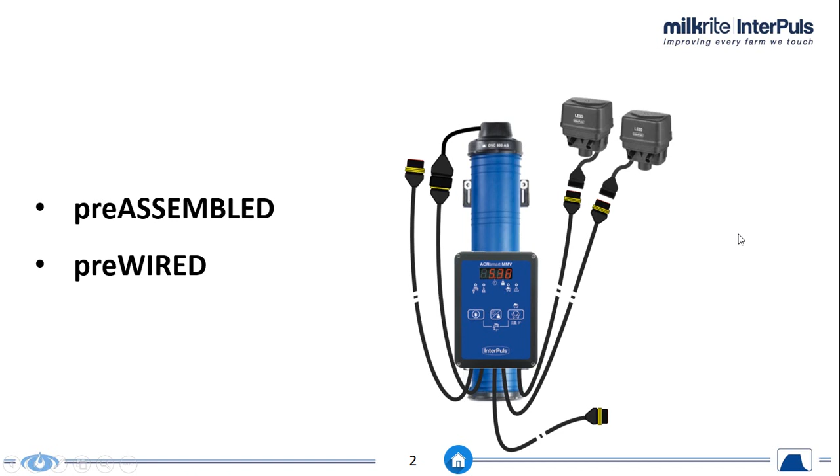In each box we have a unit that comes completely pre-assembled, pre-wired and pre-programmed. All we have to do is connect the unit to power and connect the sensor, and then the milking system is ready to go.

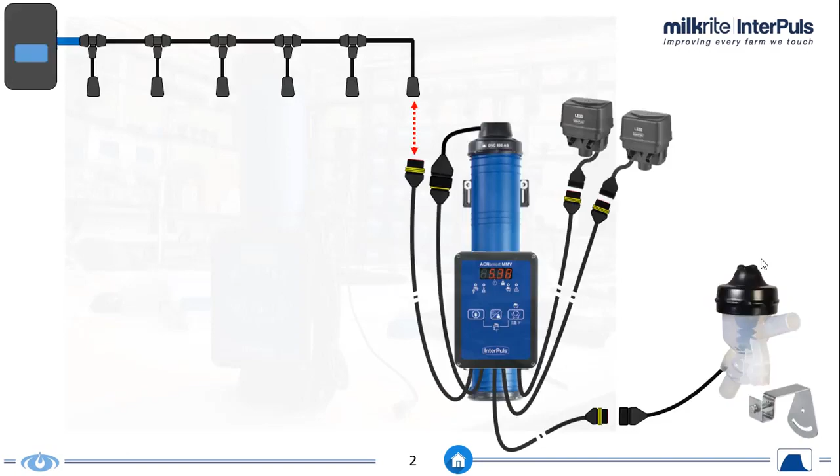This is the unit just out of the box, and here we are, for instance, in a milking parlor that never stops milking. This is one of those heavy-duty systems where the system is stopped just for 5 minutes between one shift and the other.

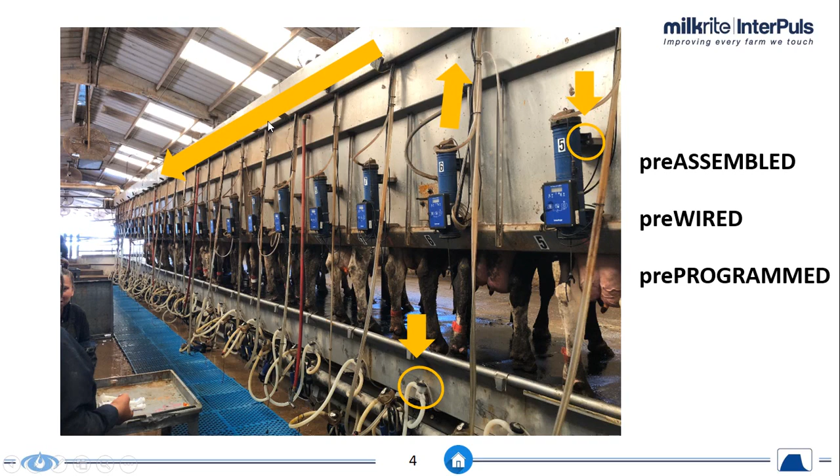In a similar situation, the dealer just has to install the cylinder on the metal frame. He has to put the sensor in a proper position, and then he has to bring all the cables to a safe place where he can run his plug and play easy wiring without compromising too much milking operation. The installation is very fast.

This is really cutting a lot the cost of installation, is minimizing the disturbance in the milking parlor, and also this permits to instruct a local technician at the farm to easily replace a cylinder, a panel, a control valve, a pulsator, a sensor in case of a problem without stopping milking.

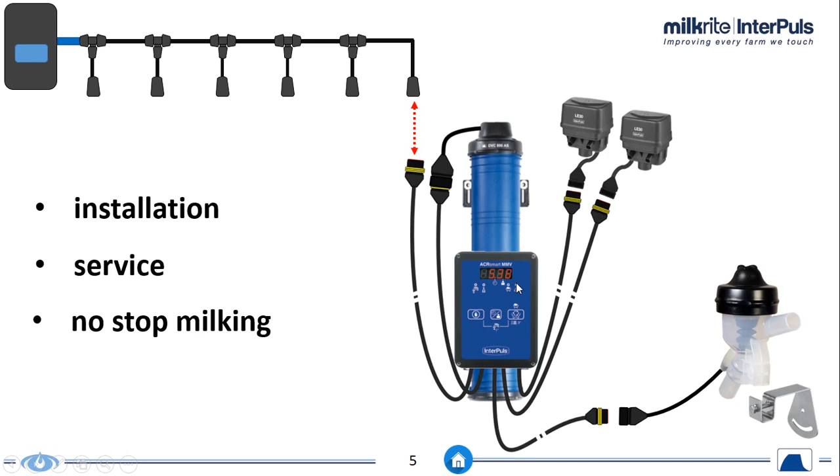This is extremely important. The service can be done overnight by a technician at the farm. This doesn't require any particular technical skills.

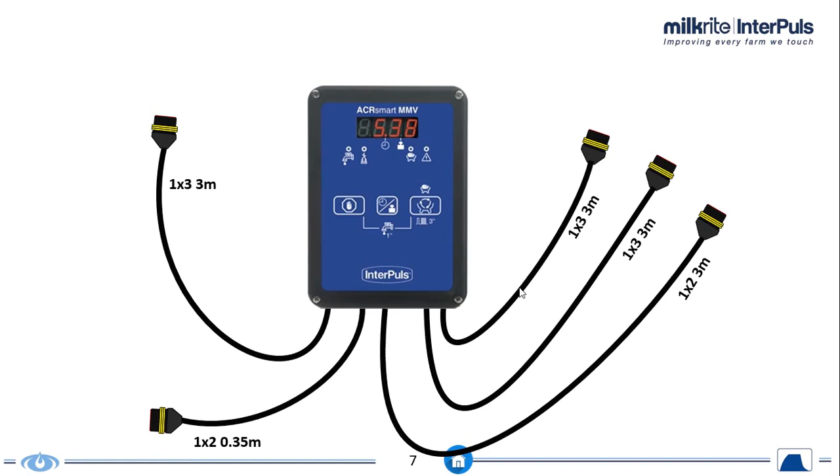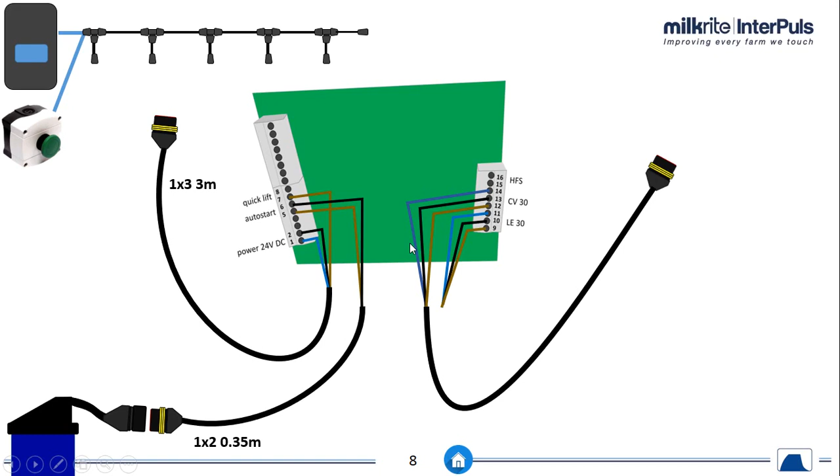What do we mean when we say that the system comes pre-wired? There are 5 cables. The first one is connected to power and quick lift - we will see later what quick lift is. A second one is connected to the auto start on the cylinder. Then we have 2 cables connected for control valve and pulsator, and the final cable is connected to the HFS. All this wiring job is done in our factory.

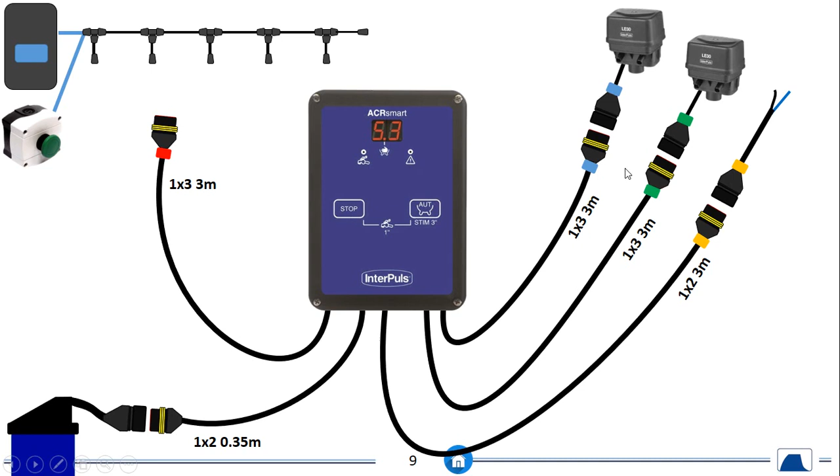So the dealer receives this unit with some colored rings to prevent error while installing it. We really try to make the operation as easy as possible and as problem-free as possible.

The panels are pre-programmed. What does it mean? We have a lot of parameters because some of these panels are ready to work both as detacher and as milk meter. Of course, they will be all pre-programmed in order to work as detacher, and they will be tuned for heavy-duty farms.

What we recommend is to install a couple of panels, let them work for 2 days, for 1 week, whatever. And when the farmer is convinced, you fine-tune all the parameters in order to obtain the best possible detacher level, etc. There will probably be 2-3 parameters that will need to be fine-tuned in that farm.

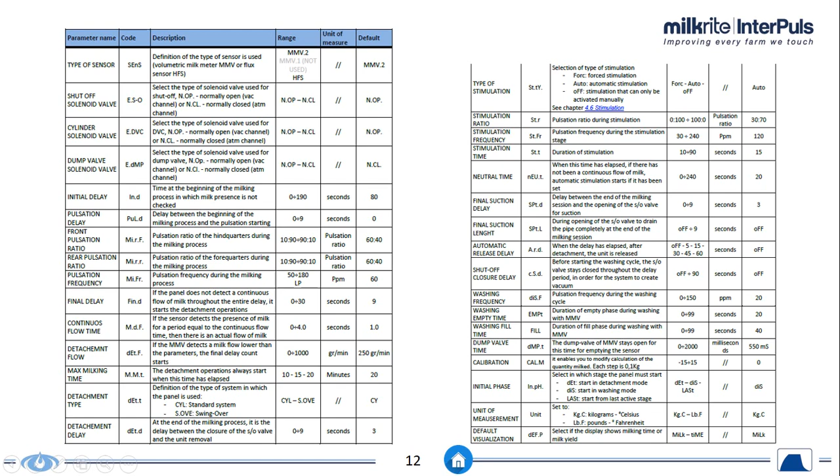Then you can make the same modification on the remaining 44 or 46 panels in the office. You bring them to the milking parlor, and then you can install them very, very quickly.

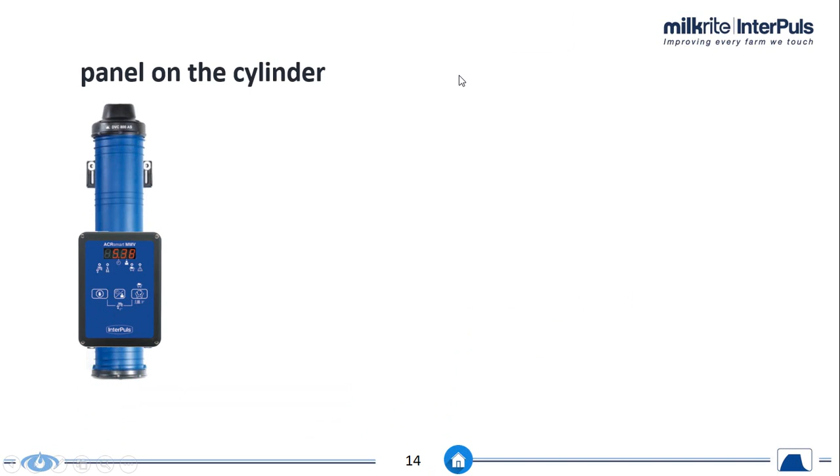The idea is to have 4 models at the moment. Maybe we will add more. One model will be with the panel mounted on the cylinder. Another model will be with the panel separate, and in this case we will have a longer cable - 3 meters for the auto start.

We are thinking if there is also the need, but we wait to collect some more data, for a similar situation where the dealer didn't want to use the plastic vacuum cylinder, but wanted to continue using the existing air pressure cylinder with the chain, etc. In this case, it was not possible to use the plug and play. We are considering if there is the need to create a 3rd plug and play for this situation.

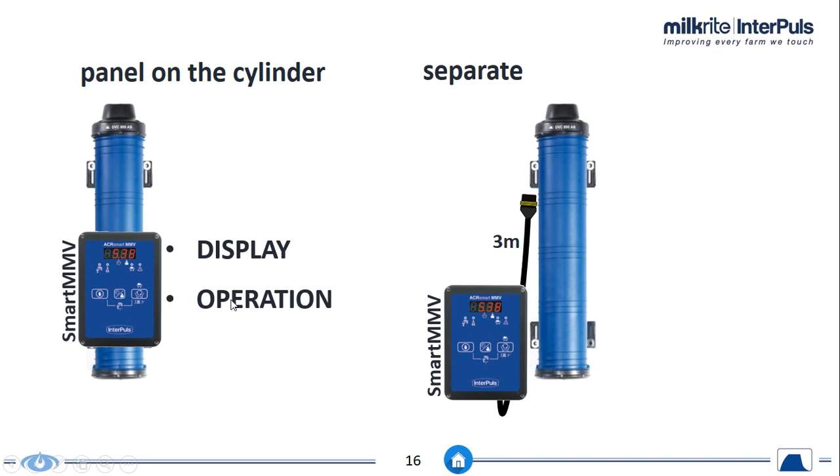At the moment, we will start with 2 models, MMV. What do we mean with MMV? On this panel we have a large display that permits checking milking operation and helps during programming. We have 3 buttons that help milking operation and programming, and we have the possibility to upgrade this panel in the future with a milk meter, in order to transform this system from a simple detacher to a real milk meter system, ICAR approved.

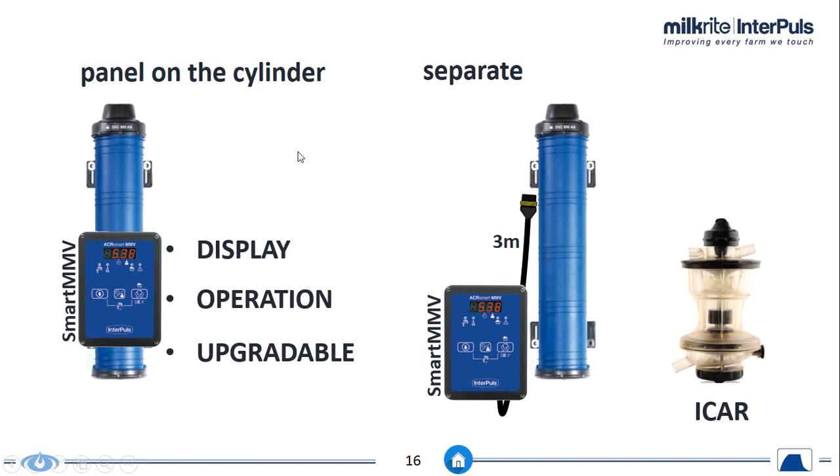But we want to introduce also 2 more models, not with the MMV panel, but with the smart panel. This has a smaller display, only 2 buttons, and cannot be upgraded to a milk meter, but of course it will come at a lower price. So if the price is the driver, this is a good solution in any case.

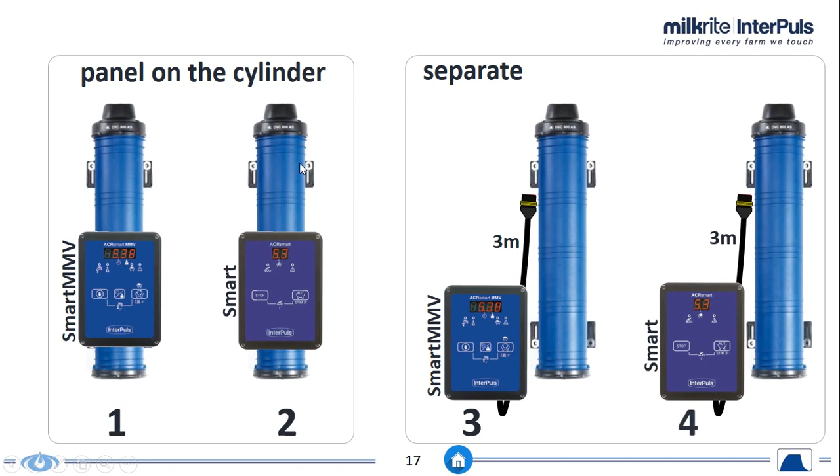As I mentioned before, now we have the idea to launch 4 models, and we will investigate if it is the case to put 2 more models for this particular situation.

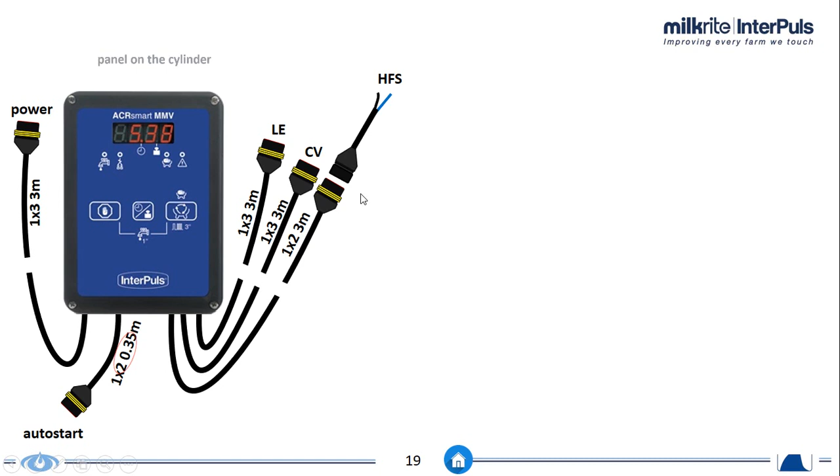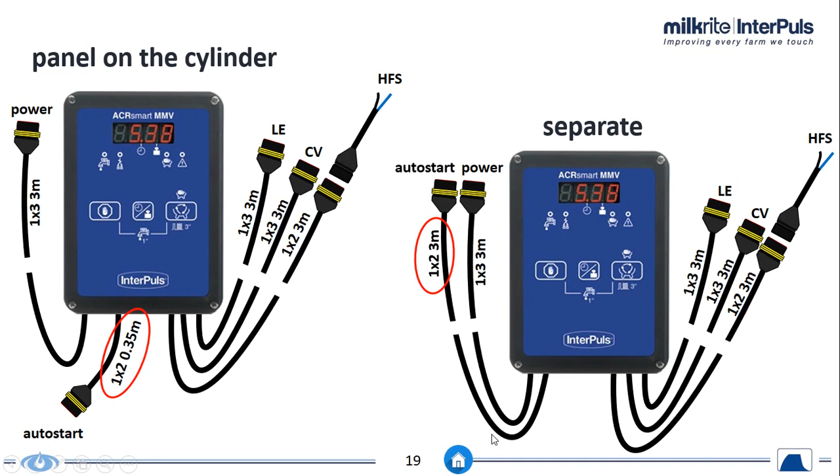The main difference between the model on the cylinder and the model separate is, first of all, the cable - which is only 0.35 meter in the model that goes on the cylinder, the autostart cable I mean, and in the other case is 3 meters long. But also in the separate model, the bracket for the panel will be optional, because we have few dealers who manufacture their own pre-shaped support for the panel, so they probably don't want to buy the one that we provide.

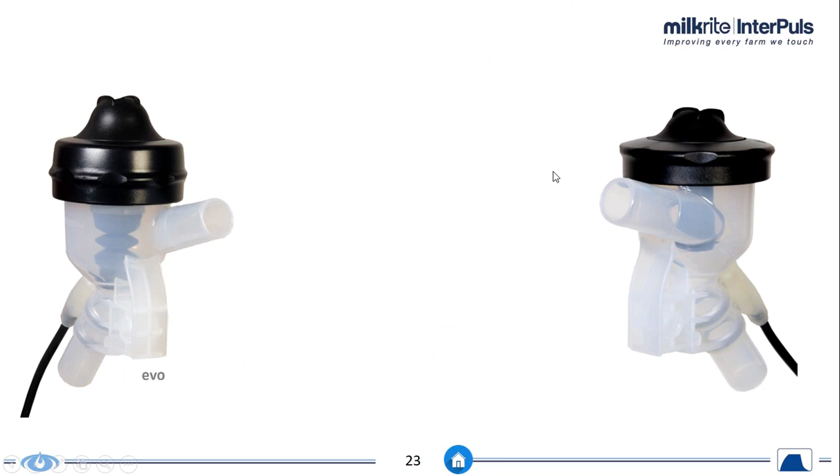So it will be optional, you can buy it or not. Also, the HFS sensor will not be included in the box, because we want to give dealers the possibility to select the Evo or the standard model. And the bracket for the sensor will not be included either, because some dealers are manufacturing their own bracket.

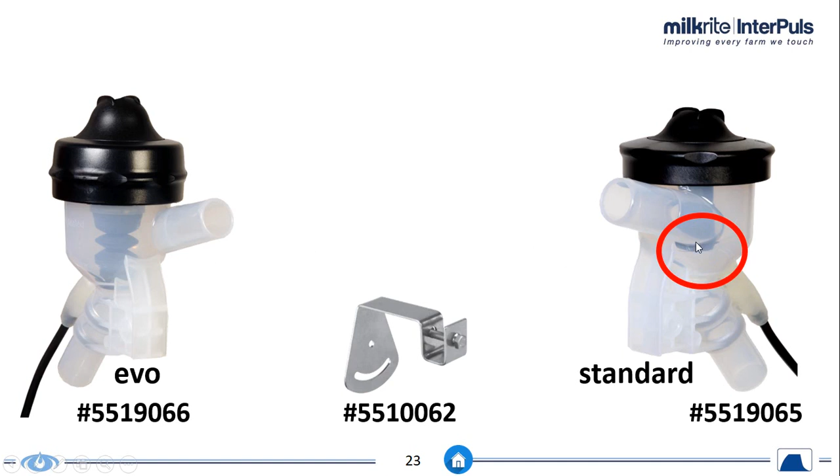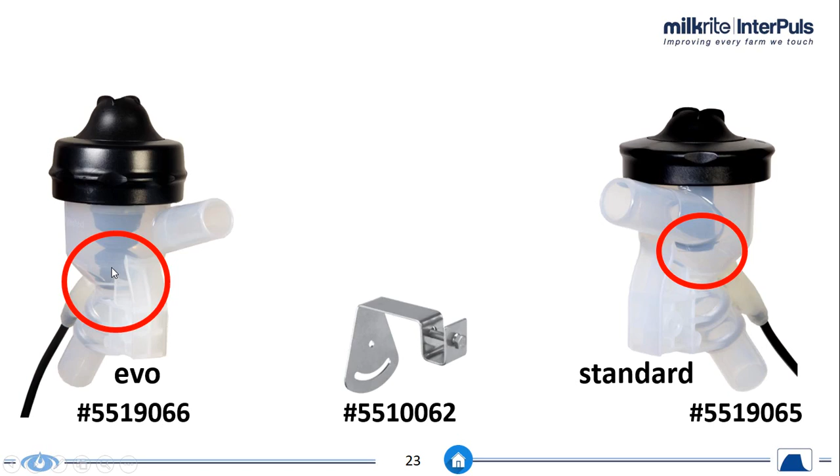The difference between the standard and the Evo is simple. When the vacuum pump is switched off, the standard starts open while the Evo starts completely closed. This is a big advantage to help vacuum build up when we switch on the pump. But on the other side, the Evo has more parts, it's a little bit more tricky to service, and it's more expensive. So what's important is to have the two options.

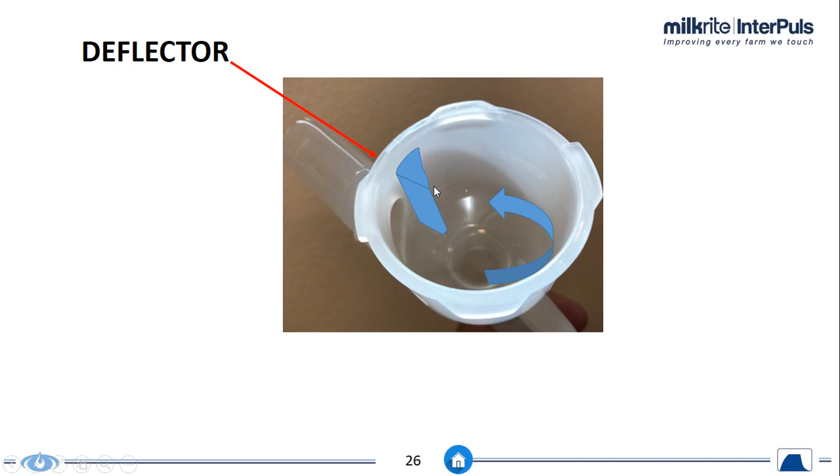Both options will have the deflector. What is the deflector? It's an element we introduced recently. You see it's co-molded here in the body of the sensor. The deflector stops the fast spinning air, especially in heavy duty conditions when 4 liners are open together. This creates noise, and also when we have high genetic cows, the deflector helps reduce the vacuum drop. So these are the two big advantages.

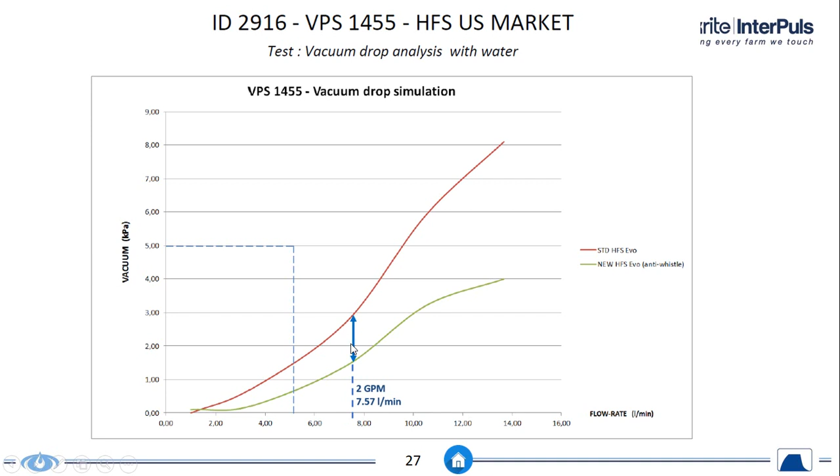It can reduce the vacuum drop in most cases by half. So, big advantage, the deflector.

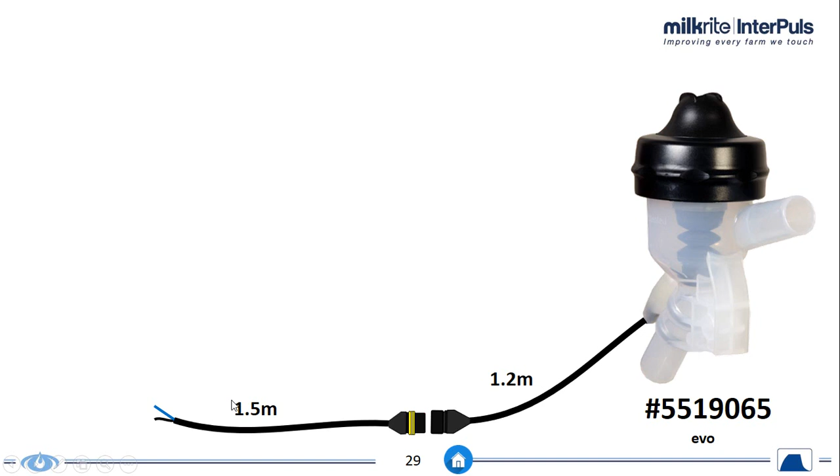Both models, the standard and the Evo, will have a pre-connected cable. This is co-molded, 1.2 meters, with a plug-and-play connector at the end. In both cases, we will also add an additional 1.5 meter cable. This is useful if we have to run the HFS sensor around the metal frame. The dealer must make a clean connection, and he can leave this part fixed while keeping the two parts plug and play. The fact that he's connected a long cable doesn't mean the sensor can't be replaced - it can easily be replaced because the plug is 1.2 meters from the milking point, in a safe place but accessible for easy replacement.

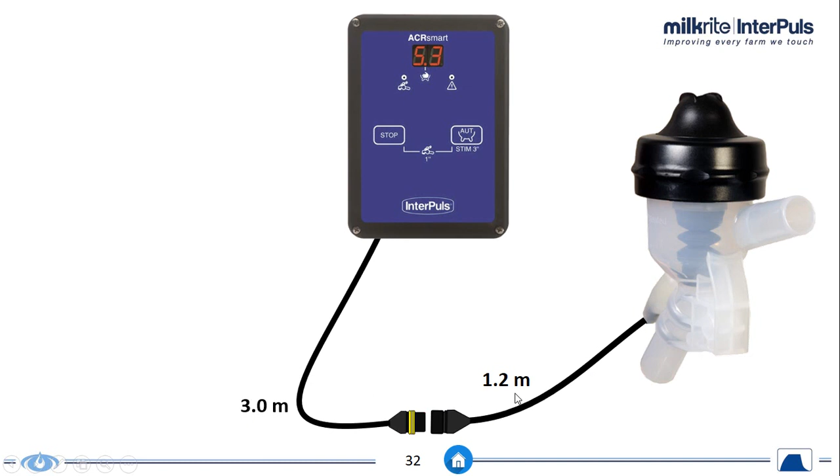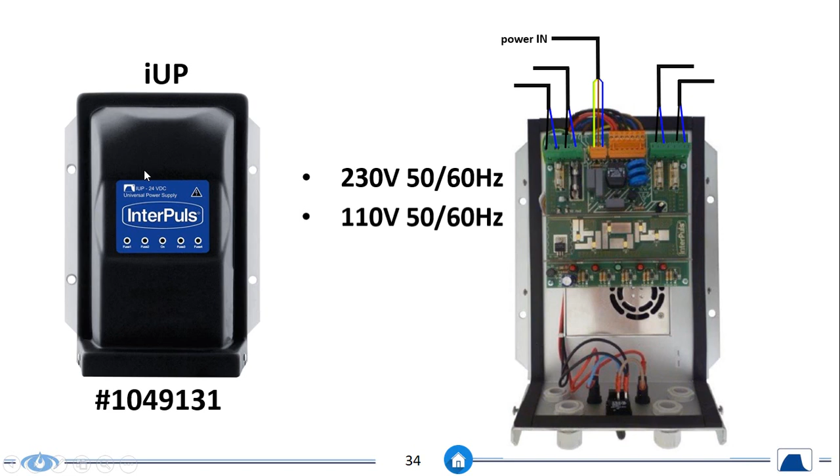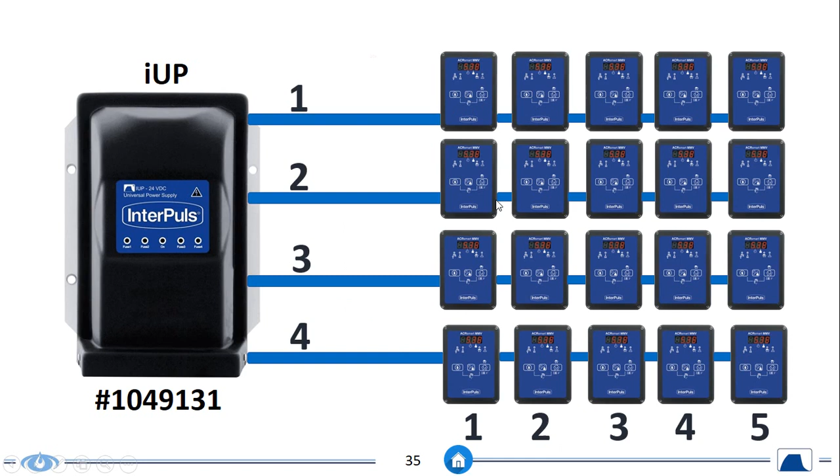Power. To power the system, we use our IUP power unit. It has input of 230 volt, 50-60 Hz, and 110 volt, 50-60 Hz. So with one unit, we can cover all the needs out there. And then we have 4 outputs. On these 4 outputs, we generally recommend connecting a maximum of 5 units. So 4 by 5 means 20 units per transformer.

Why do we recommend 20 units in a normal situation? Because we don't know if the dealer is going to use a CV30 or an LE30 as a control valve. There are very good reasons to use a CV30 in some cases. But when we use a CV30, when the cluster is not milking - when it has been taken off from the cow - the two coils are both energized together. And when the system is milking, the two coils are powered off.

So energized at takeoff, not energized during milking, both together. But in plug and play, we will always use the LE30 as a control valve. The LE30 has the advantage that it always has one coil energized and the other not energized, both in milking and in takeoff. So we never have this situation where two coils are energized together. The consumption is lower and we can connect up to 24 units to one IUP.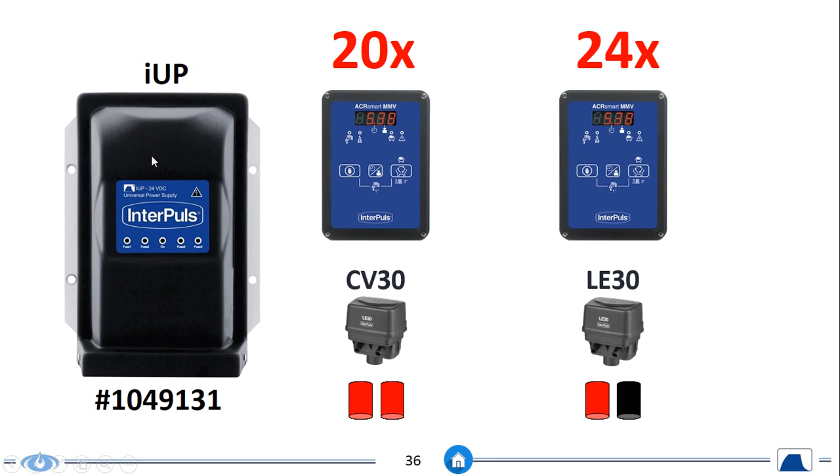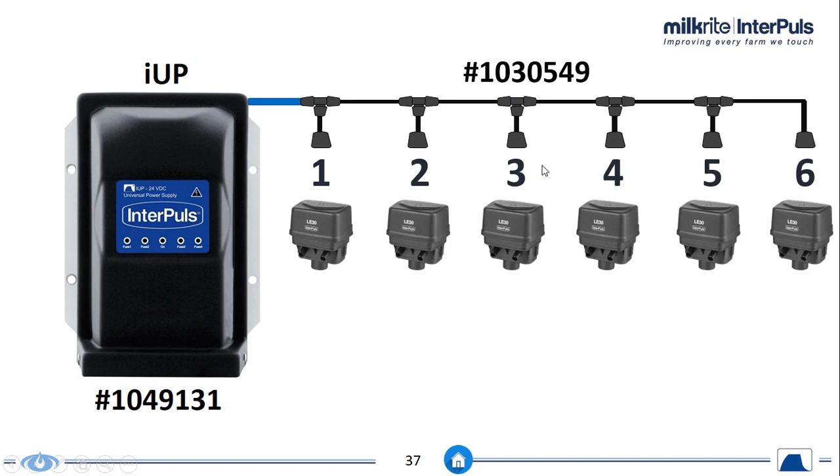This permits us to use one of the wiring harnesses we designed for pulsation exchange. We have two wiring harnesses: one has 8 plugs and one has 6 plugs. In this case, we will use the one with 6 plugs, code 1030549. And instead of connecting pulsators, we will connect ACR smarts to these 6 plugs. Since we have 4 outputs, 6 by 4 equals 24 units connected to one transformer. Big advantage.

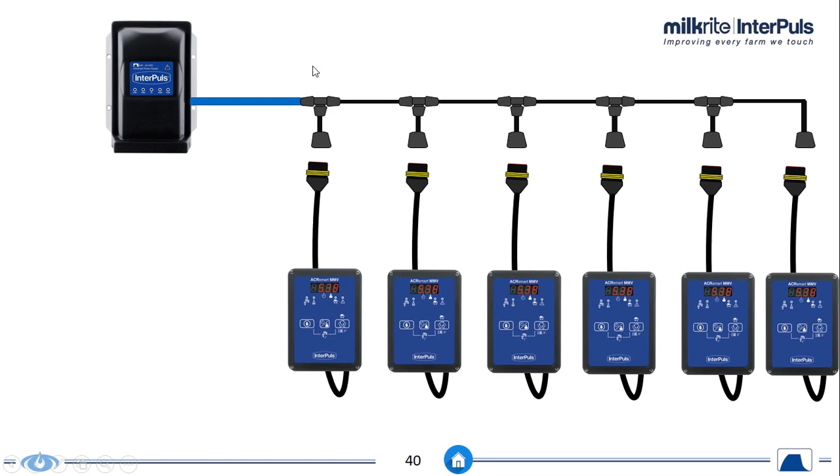Quick lift. These plugs here are not 2-pin plugs, but have 3 pins inside, and the cable also has 3 wires inside. Why? What do we need the third pin for? From the transformer, we only give plus and minus, so in theory we need only 2. The third cable is used to connect to the quick lift button.

The quick lift button is very useful, especially in large systems. It lets you click the button and lower down all the clusters together without opening vacuum. This is extremely useful when you want to put the clusters on the wash plate without opening vacuum and having a big vacuum drop in the system.

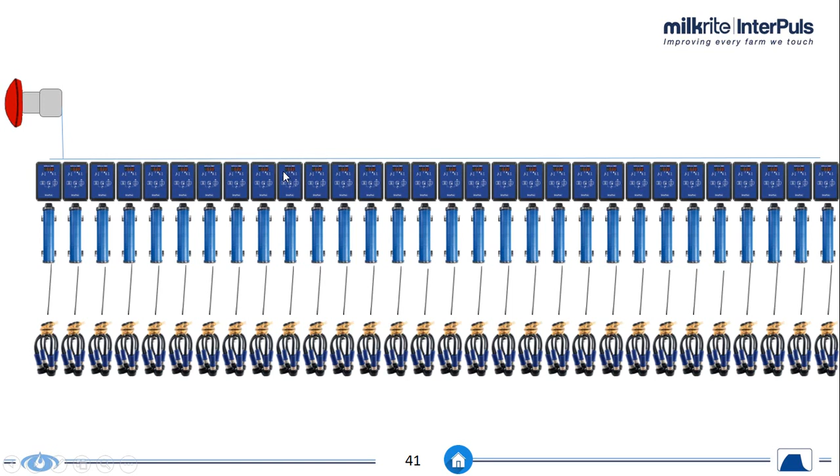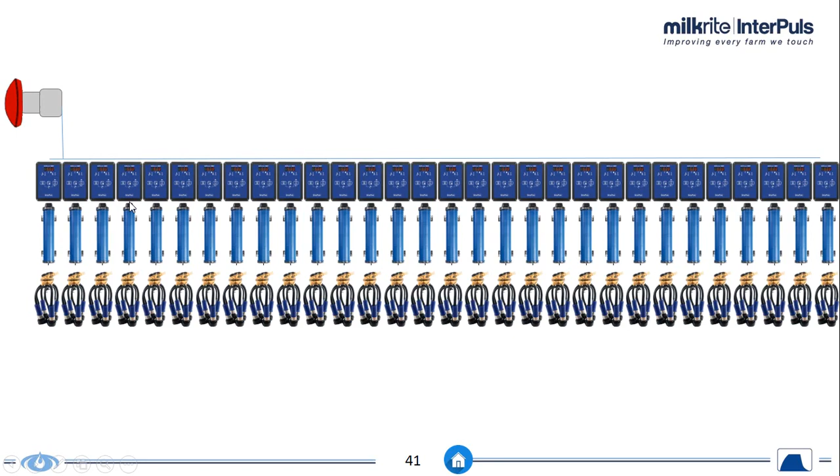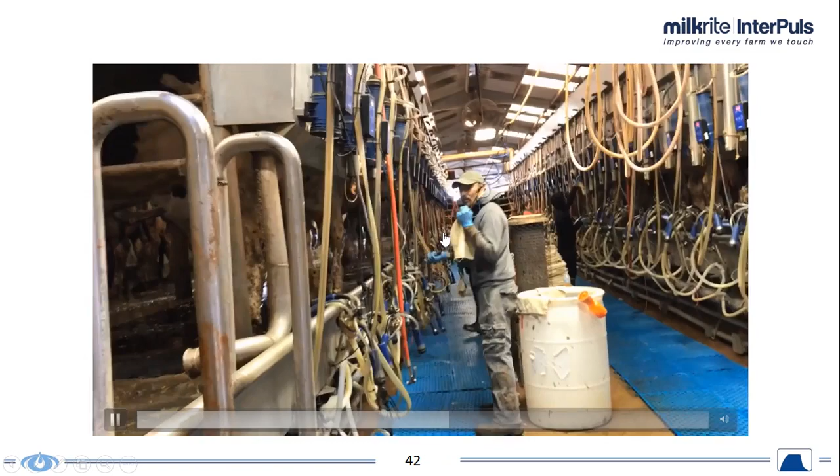If you click the button again at the end of washing, all these panels will switch from wash mode to milking mode. Click a third time and all the panels will come up together. This is very useful because it prevents the milker from going from one panel to the other to switch them from washing to milking and to lift up all the clusters. We can see here, for instance, when I tested the first time in this farm, the milker didn't expect it — he was preparing the cow and all the clusters fell down. So it's easy like that.

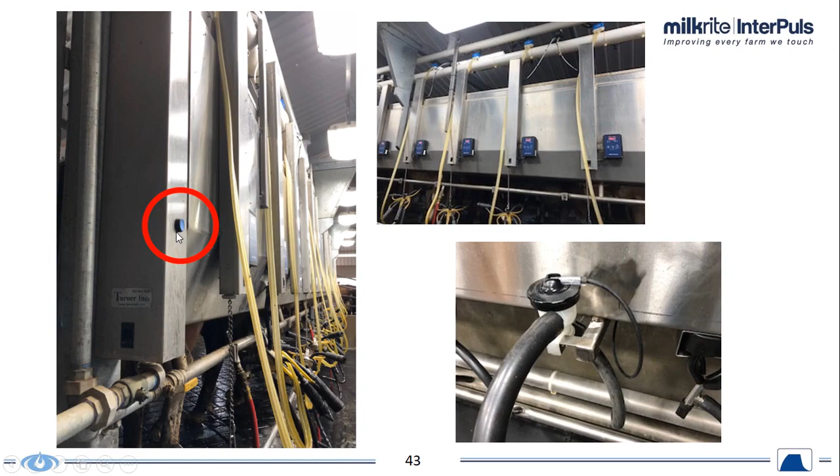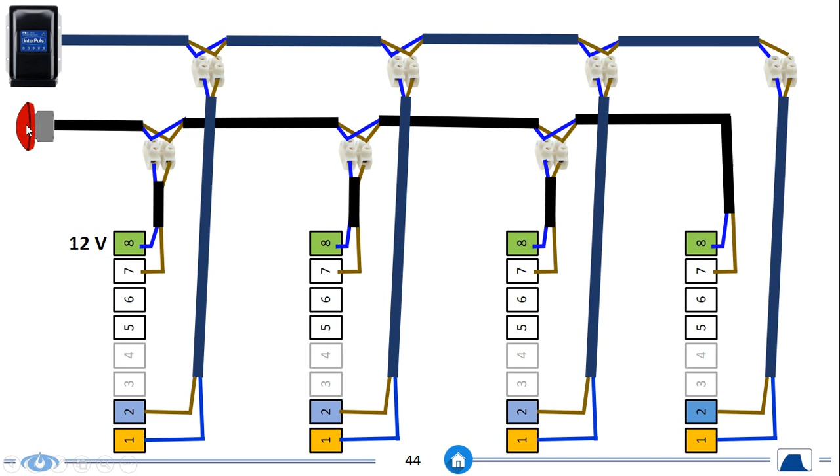They are really using it a lot. In most cases, they use their own button — they have their own solution, the dealers. What is important is that they follow the wiring scheme. This is a complex wiring scheme for the non-plug and play case. In this case, you see they have to run two different wires, one for the quick lift, one for power, and they have to do all the wiring manually.

But in the plug and play, we make their life easier. Everything is pre-wired. They just need to clip, clip, clip, clip, and at the end, they shall make this connection. We don't go into the technical details — easy, this is what you need to know.

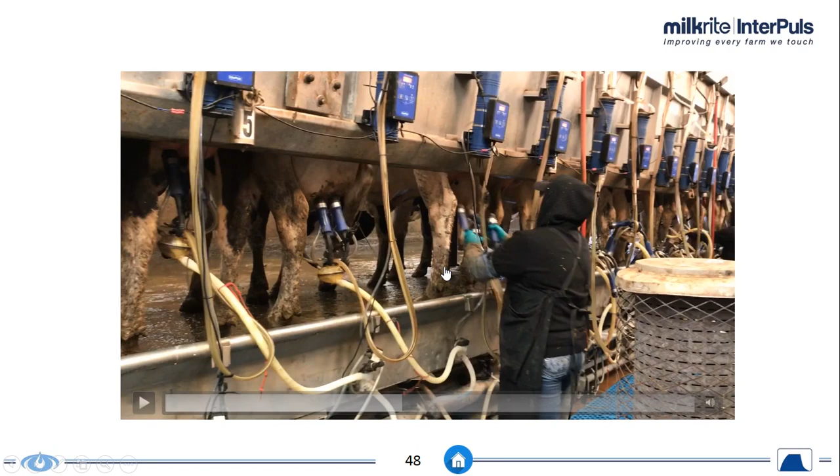Auto start is another important feature, both with ACR Smart and ACR Smart MMV. The milker doesn't need to press the start button on the panels, but only needs to lift the cluster a few millimeters in order to start the milking operation. We can see it here. This is really speeding up the operation, especially in large systems like this where they have to go as fast as possible. So they don't need to press the button here — they just take the cluster in hand and start to attach them.

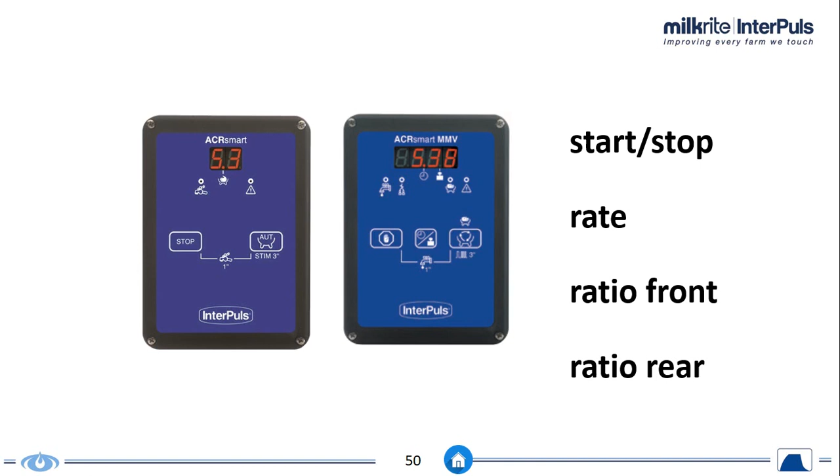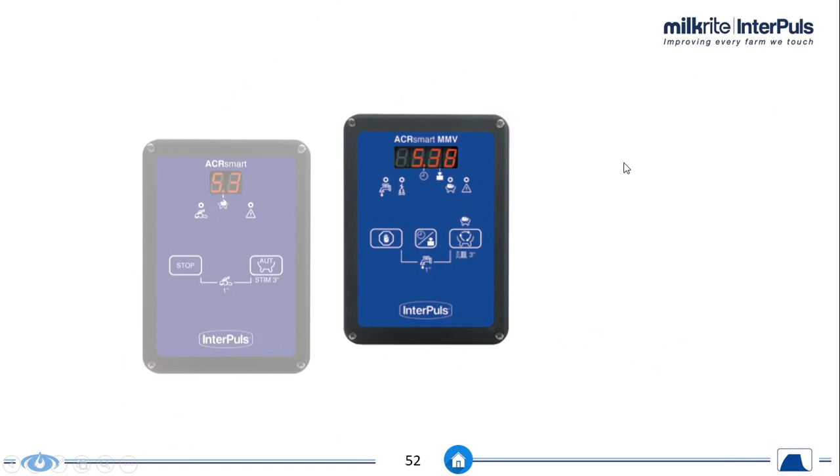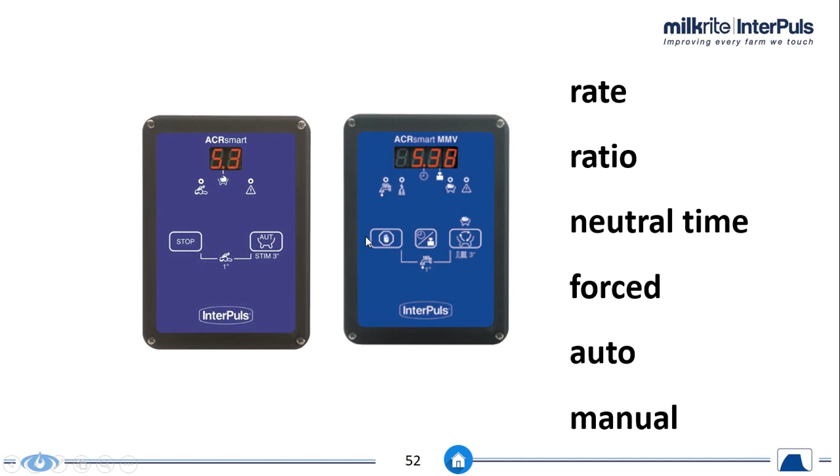Both the Smart and the Smart MMV stop pulsation when the cluster has been removed. They can control rate point per point — we can adjust ratio front, ratio rear point per point. This means that we can really tune pulsation according to the presence of a vented liner, according to the level of vacuum. We can really obtain the best possible pulsation performance. It's also possible to enable different types of stimulation, both on the Smart MMV and on the Smart panel. We can have automatic stimulation, fixed pre-stimulation, on-demand stimulation, and also rate and ratio are adjustable.

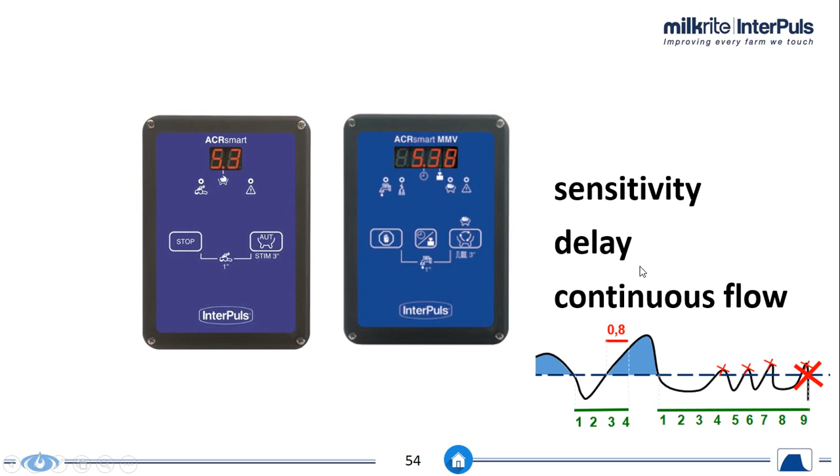Another important feature is what we call advanced takeoff. Normally, other detachers in the market trigger the threshold for taking off the cluster based on sensitivity — how many grams per minute — and based on delay, how long we wait for another significant flow. We have a third parameter that we don't need to explain here in this commercial presentation, but we can do it in another one, of course. This permits us to trigger the takeoff level and be extremely precise, both in case of a sheep, a goat, a low genetic cow, or a super high genetic cow with big milk flow. So we can really be extremely precise on the takeoff.

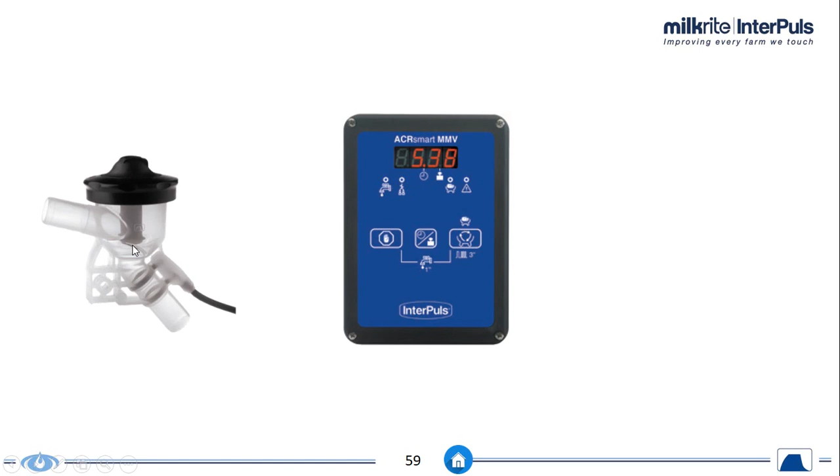The MMV, the smart MMV model, not the simple smart model, is upgradable. We already said that at the beginning, but it's important to repeat it. We can start with a simple HFS system, and in the future we can upgrade this system to become a complete milk meter, ICAR approved.

There are some accessories that can go with this ACR plug and play. We can provide a remote start button, but of course the dealer can also use his own button that he has already tested and is confident with.

The silicone spray is very important. It's important to always give a couple of bottles when we sell a system so that they can lubricate the pistons and the cylinder very easily. This is a quick operation, but it's important to do it from time to time. This is actually the only maintenance operation that we need.

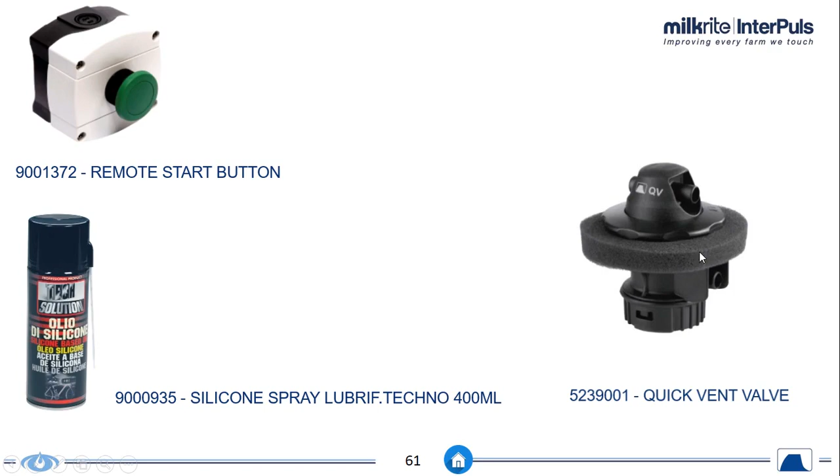And the quick vent valve — the quick vent valve is not included in the box. It can be easily mounted, and there are clear instructions, so we don't need to lose time explaining the purpose. The quick vent valve has the advantage of permitting the cluster to really fall down into the hand of the farmer when he's milking. So especially if there is a long distance, like in this case, if the cluster is lifted at a high distance from the cow, it can be a good idea to add the quick vent valve. But it doesn't mean we have to use it in any case, so we prefer to keep it as an optional — it must be ordered apart.